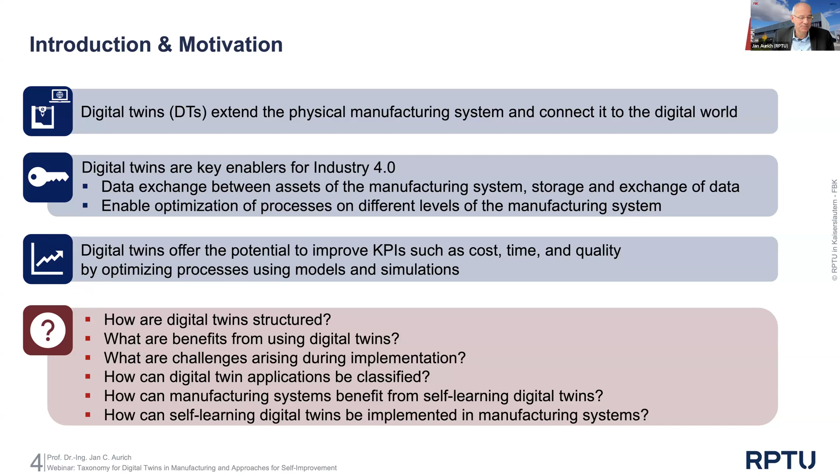So a little bit staying with the introduction. If you look, the concept of digital twins is now a little older than 20 years. The first mention in literature we find around 2003, and this is taken actually from a reference and publication from Fei Tao, I think, from Beihang University. Many of you know him. So the concept was first mentioned, then there was like the first 7-8 years an exploration phase before the digital twin concepts got better and better in this incubation stage in the next 3-4 years. And since then, since about 10 years ago, we see a very fast growth actually in digital twin applications.

There are more and more areas where digital twins are applied. I mean, they come mostly from product design and engineering, mechanical engineering product design, but we apply them in manufacturing. That's what we do, but we also find digital twins in civil engineering of buildings, of cities. NVIDIA's Jensen Huang, in one of his recent talks, talked about a digital twin of the world. But if you look in more detail, it's mostly about weather forecasts and meteorology and climate forecasts at the moment. So we have many, many applications of digital twins being defined and implemented right now.

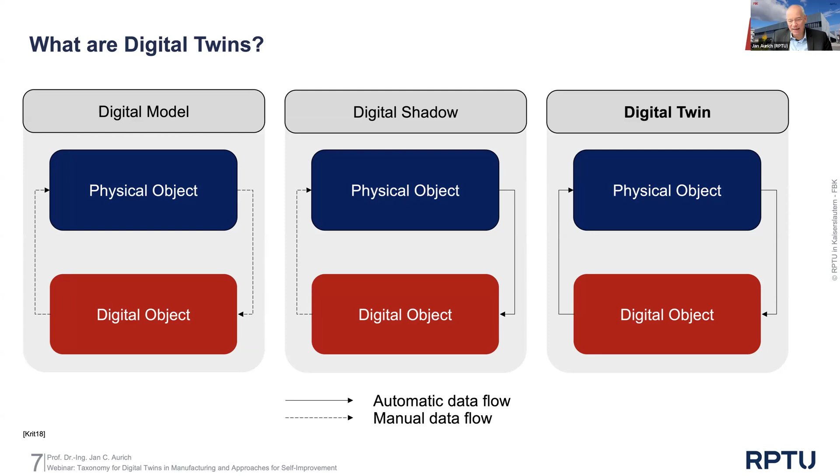If you go to a digital twin, we have both: the automated data flow from the physical object, and back from the digital object to the physical object. Only then should we call this a full digital twin. I'm now going to talk about the digital twin for the rest of my talk. So we have a data flow from the physical world to the digital world, and then back from the digital world to the physical world.

If we see what we can do with that, it's detailing what I already said. We have automated bidirectional data exchange, and an important point is also the real-time capabilities and high-fidelity virtual entity. I have to explain that a little because these terms are not absolute. What's real-time and what's high-fidelity?

Real-time can be quite different depending on the purposes, but I think it's always something between microseconds or seconds. It's not like we wait hours or days for feedback. For some applications, the time order of seconds may be enough.

But if I think of the use case I'll show at the end of my talk, a machine tool which is actually controlled from the digital twin, in that case in an edge cloud of a factory, you really need microsecond delay time—just a few single-digit microseconds from the digital twin to the real machine. So real-time is very often microseconds, sometimes a little longer, in the domain of single-digit seconds.

Then high fidelity means the digital object or representation should contain all the information necessary to do the intended control of the physical object and to understand it. But we have to be aware: digital representation is never a one-to-one representation of the physical object. Not all characteristics are part of the digital object, just the ones we need, but all the ones we need should be part of the digital twin.

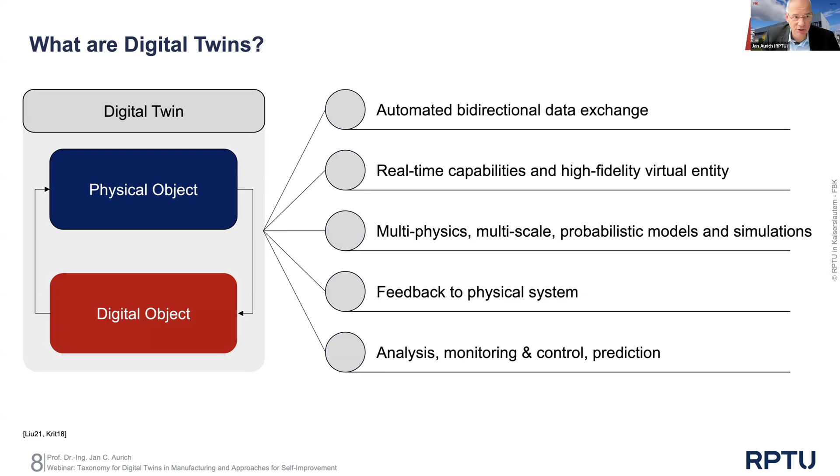And all of this can be part of a digital twin. We have the feedback to the physical modeling, to the physical system, and we use the digital twin for analysis, monitoring and control, but also for prediction of the behavior of the real-world physical object. So that's what the digital twin is about.

But we also like to include services as part of the digital twin. If you look at a factory, simple services like maintenance, provision of tools, and other things necessary for the manufacturing process. But it could also be training and education for workers—many services we can imagine for a factory. If we want a full digital twin, these should also be modeled and part of the data model used to represent the factory or manufacturing system.

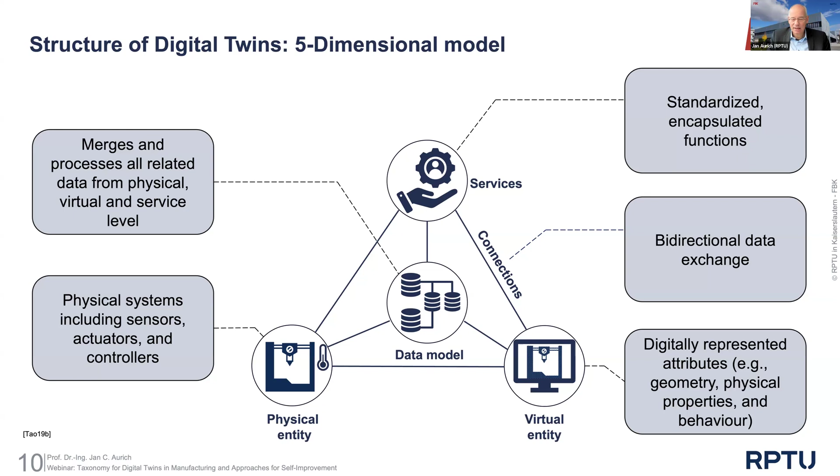The data model merges and processes all the related data from the physical, virtual, and service levels. Services have now standardized, encapsulated functions, and there's bi-directional data exchange, which I mentioned earlier. In the virtual entity, we have the digital representation of all attributes of the physical entity and the services provided, like geometry, physical properties, and behavior of the manufacturing system. So that is this 5-dimensional model of a digital twin.

If we look at the difficulties and challenges, why it's so difficult to implement a digital twin in manufacturing, there are several things to consider.

One is we still have a rapid evolution of the DT concept. So we implement a digital twin following the current state of the art, and a year later a new concept introduces new possibilities. It's not possible to have one static digital twin that stays the same as long as the factory is operating. I worked in the automotive industry, where passenger car models have a lifetime of 6-7 years. During that time the manufacturing system wouldn't change that much—there's continuous improvement, but the basic layout doesn't change. Yet that doesn't mean the digital twin can stay the same for 7 years, because it would become completely outdated given the rapid evolution of the DT concept. That's difficult to incorporate and follow.

Then we still have a lack of standardized DT approaches. There are some—I'll talk about one, the AAS, in a second—but it's not like we have one worldwide accepted standard for digital twins that everyone uses. There's been a lot of development in the past years though, so I think we're proceeding quite well there.

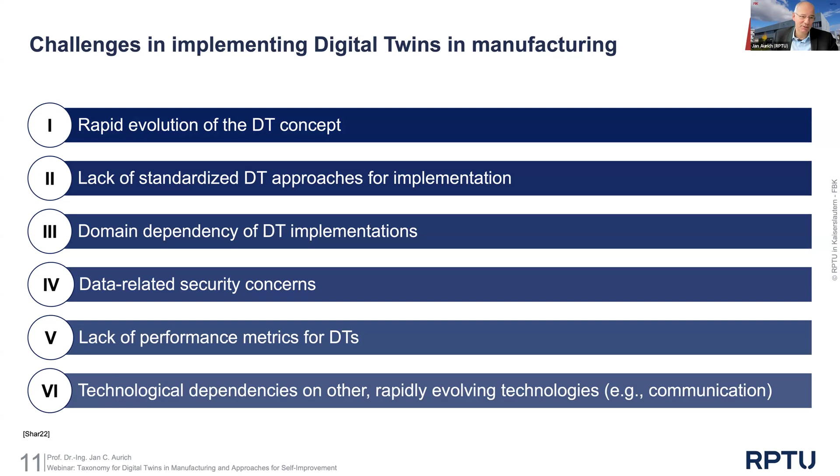Okay, then what we use now, and I talked about lack of standards. There are a couple of standards already implemented and accepted worldwide. One is the AAS, or Asset Administration Shell, which has been standardized to guarantee interoperability for autonomous systems and also AI applications, but mostly interoperability for autonomous systems. And we can use this also for standardized data exchange for digital twins and for the implementation of digital twins.

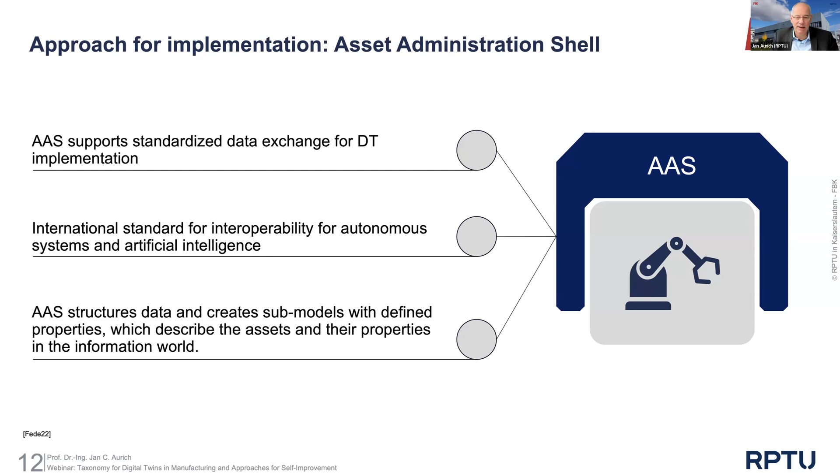AAS structures data, creates submodels in predefined ways with defined properties. So we have a standard to describe the assets and their properties as they're in the physical world, in the virtual, or in the information world. So AAS is one of the standards which are now implemented, which are very well suited to be also applied to digital twins.

So let me come to an interim summary, because before I come to the second part of my talk, if you look at digital twins, there's a lot of research, interdisciplinary, extensive, with heterogeneous results on digital twins. We have really lived through the shift from the concept phase now to implementation phase and evaluation of digital twins, despite all the challenges which are still there.

There are various use cases, and there's one difficulty: they're sometimes difficult to compare, because there's no single taxonomy for digital twin, which makes it difficult to compare the use cases in terms of performance.

And that leads me to the first, say, new or scientific part of my talk here: how can we classify DT applications? And then the second question will be, where is DT research heading in the future? And then I'll talk about self-learning digital twins. Okay, let me go to the taxonomy.

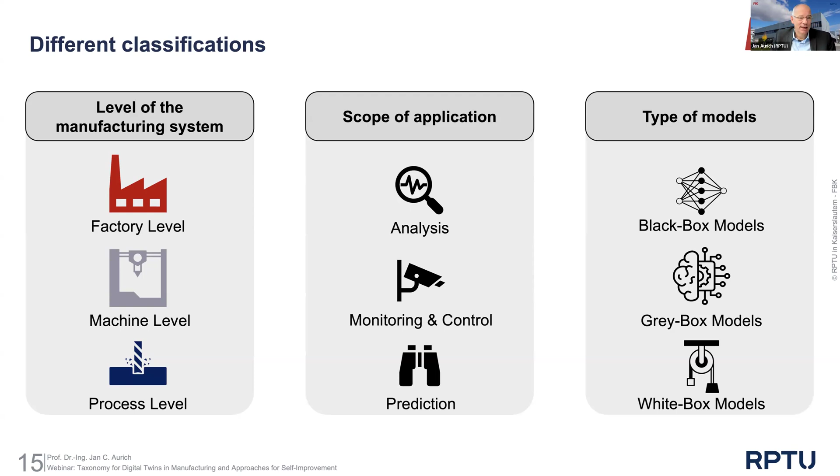So as I told you, I want to look a little bit at this distinction of the levels in the manufacturing system. So the factory level is infrastructure above the machine levels, like your material flow, the layout of the factory, also the information organization in the factory. And that, of course, is important for value creation through the machines and processes. So it's the overall factory layout.

Then on the machine level, we look at the manufacturing equipment. So that's machines mostly, like very classical, like a machine tool, a milling center, or a machine for additive manufacturing, also a robotic system for handling could be here. And actually, this is probably the area where the implementation of digital twins is the most advanced in manufacturing, because every machine tool maker now has a digital model of the machine, and it's also prepared to have this bidirectional data exchange.

And then if you go down to the process level, there are a lot of physical modelings, like finite element, or molecular dynamics models, or discrete element models, to model all these manufacturing processes, like a cutting process, a forming process, additive manufacturing process.

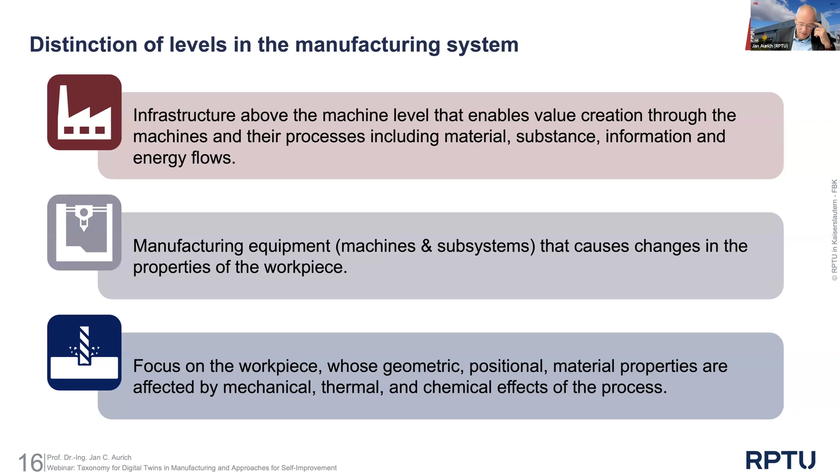On the factory level, to finish this topic, we have modeling and optimization of the entire production system with regards to efficiency, performance, cost effectiveness, also quality of the products coming out, or energy efficiency if we have an issue coming from sustainability considerations. On the machine level, we monitor and control the individual machines. And on the process level, we really look at the manufacturing processes and try to optimize those.

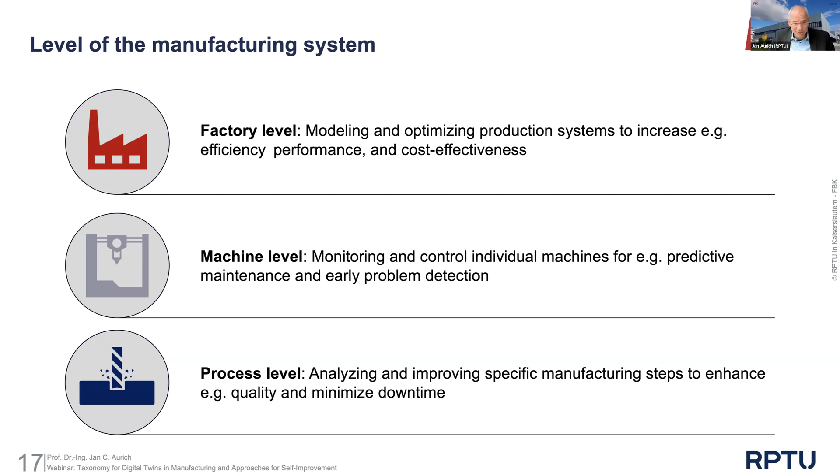So that is one category for our taxonomy for the digital twin. The second is scope of application. That's more straightforward, maybe, because it's really the scope.

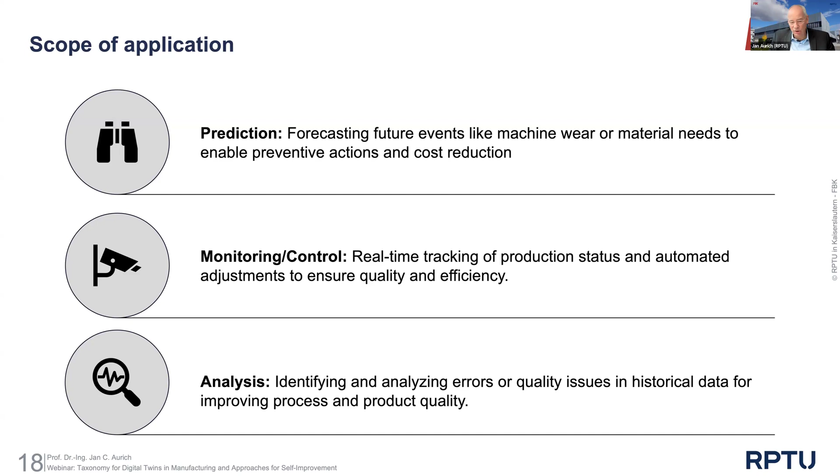Do we want to predict things like forecasting future events, for instance machine wear, material needs, to enable preventive actions in the factory? Then we have monitoring and control, so that's real-time tracking of production status, and bidirectional data exchange, automated adjustment to ensure quality and efficiency. And then we have analysis: identifying and analyzing errors, quality problems in historical and existing data, with a goal to improve process and product quality.

So the third classification in this taxonomy is type of model. Do we have a white box model, using existing knowledge like physical laws to model a production process or a material flow? They offer transparency, we know what's going on there, and also deep understanding, but often take a very long calculation time.

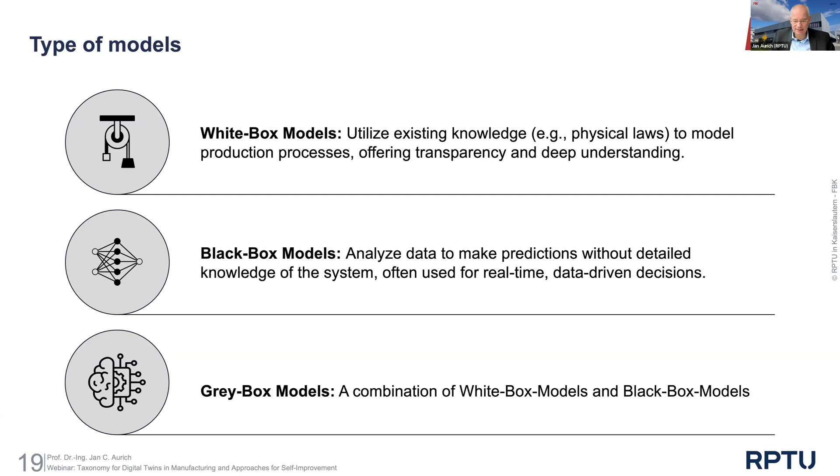Then we have these new black box models, which are data driven. So we take data from the factory, analyze it, and by that make predictions about the behavior without really knowing why the system behaves that way. And the gray box models, as I already said, are a combination of both.

And if you bring these three views together - level of the manufacturing system, scope of application, and model type - you kind of get this cube structure, a three-dimensional structure, and then you can look at what a typical or specific digital twin implementation does. It may be a gray box model on the machine level with the goal of doing prediction and monitoring and control. Then you have two of these little cubes out of the large cube in the center, which would form the implementation of this digital twin.

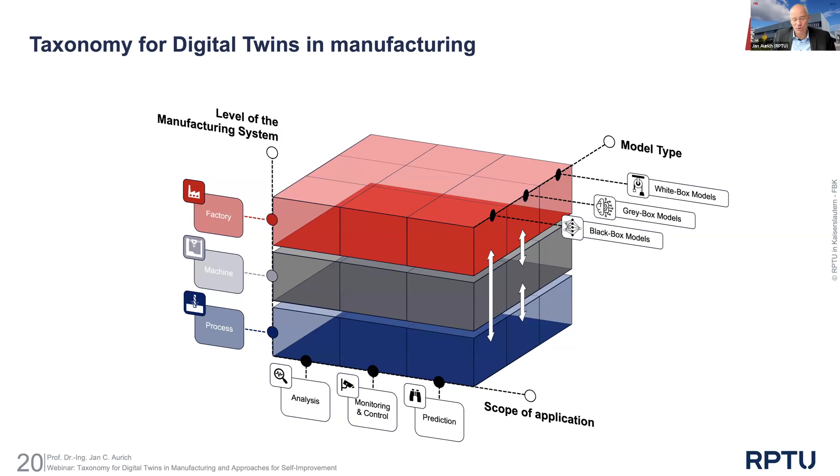So we think this is a quite nice way to show which of these parts - of course if you have all 3 by 3 by 3, so 27 little cubes implemented, that would be the highest coverage of a digital twin. But it's not in all cases necessary to do that. So it's completely fine to have a digital twin implementation which just does what is needed for the purpose, but then it should be clear what is not implemented when comparing it to another digital twin implementation. So that's our proposed taxonomy.

And now let me go on to this part of self-improvement for digital twins in manufacturing, and use the taxonomy already to look at ways for self-improving digital twins.

If I look at why we want to do this - of course, and I think also in this Auto Twin project, I don't have to convince anyone that we have to do this. We have to continuously update digital twins. They have to be adaptable to changes in the operational environment, and also to do continuous improvements of the digital twin. The factory may have continuous improvement steps, and of course they have to be reflected in the digital twin. And also, as technologies progress, it has to be possible to update the digital twin.

One other way to do this, even without technology changes, is to maybe initially have the digital twin deployed based on a white box model, a physical model. Then it may be slower than we would like. But as the manufacturing system operates and continuously generates data, this data can be used to generate a black box, or when combined, a gray box model, to improve the quality of the predictions a digital twin can make, going from a slower physical model to a fast gray box model.

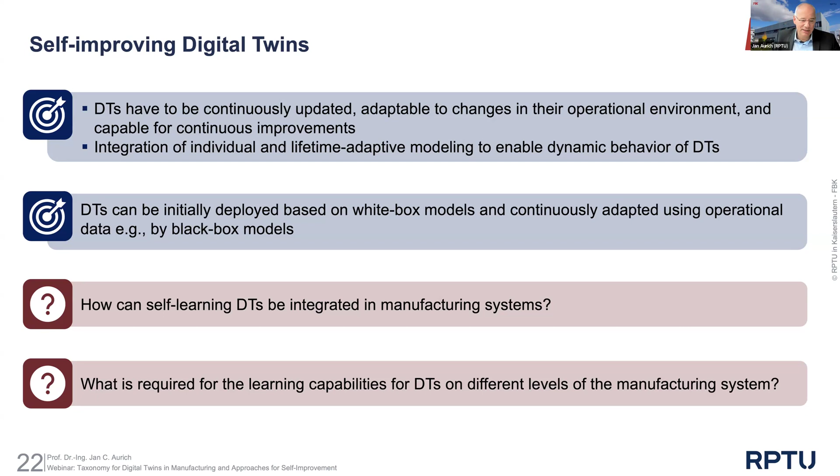So now this leaves the questions: how can a self-learning digital twin be integrated in a manufacturing system? And what learning capabilities are required on the different levels of a manufacturing system? I'd like to talk a little bit here about supervised and unsupervised learning.

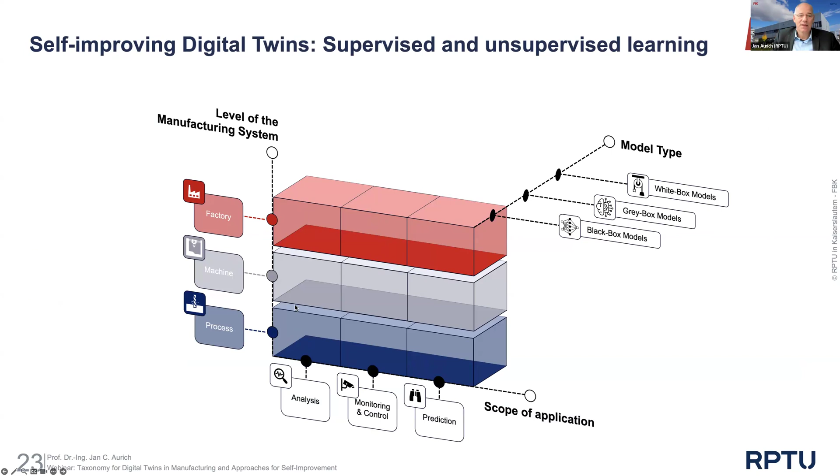That's now in relation to the black box models. If you look at where we are here in the black box model, we have scope of application across all three levels of the manufacturing system. And if we do supervised learning, what does it mean?

We need as input labeled data. So we generate data from our factory with all the sensors in a factory. We actually have a lot of data coming from factories now, but very often it's not used the way it would be possible. If we have supervised learning, we have to be able to label the data, then we categorize it. In three categories, for instance, we can classify, do regression analysis, do classifications.

Then we have unlabeled data coming into this process. The idea of supervised learning is that once we did this with labeled data, it is possible also to predict the outputs for new, unknown inputs which are not labeled. If we go to unsupervised learning, then we have completely unlabeled data, and do all the clustering, regression, or anomaly detection without data labeling. Of course, if we have labeled data, this is easier to do. But with unsupervised learning, we really have to find the patterns and correlations only in the data sets.

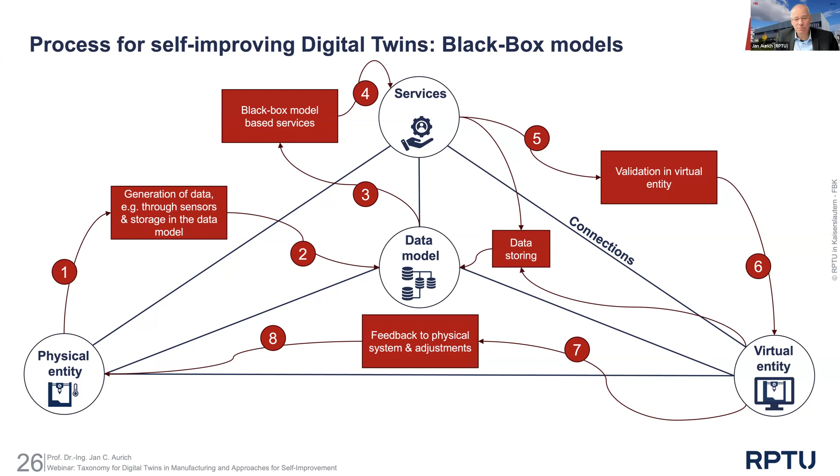So that's the second step. Then we have a data model, which is generated just from the data, so that's a black box model. But we can then provide services for the factory, like maintenance, for instance, from the black box model. Then we can validate that in the virtual entity and try to generate more understanding of what's going on there, store data again, and give feedback to the physical systems, making adjustments in the physical system. So that would be one concept for a self-learning digital twin with a pure black box model.

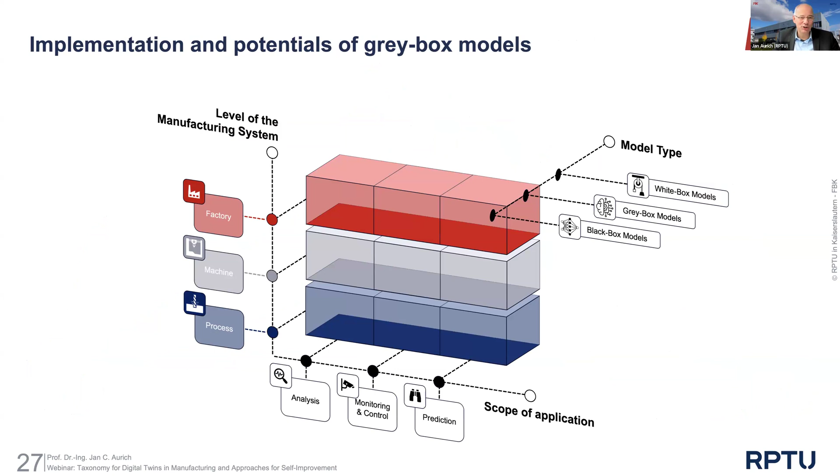Now, if we go to the gray box model, this means in our taxonomy, this entire thing shifts one. We look at the cube like a center of the cube, and have the implementation of the potential gray box model. Then we may start with white box model based services. We may have a physical representation of our factory to do predictions there. We store the data from the white box model, and from that we develop black box model based services, which again are used as services.

And then, of course, we can combine the white box model-based services and the black box model-based services to have gray box model-based services. And then they are, of course, again used to predict the behavior of the physical entity, to control the physical entity, and also to analyze its behavior.

Okay, with these two approaches, now I'd like to go on to my use case as the last thing I would like to look at, and show you how we implemented not all of these conceptual ideas, but quite a few of them already. We have a hybrid digital twin for a CNC machine tool. You see that on the lower left part. It's actually a machine tool with an open source Linux-based CNC.

This was the only way for us to really develop it and implement things the way we wanted to, because commercial CNC controller providers at the moment—some things are changing now—but when we started this project, they were not so open to these changes into their machine tool controls. But this is a 3-axis milling machine, and you see there the milling tool and the main spindle, and some of the kinematics.

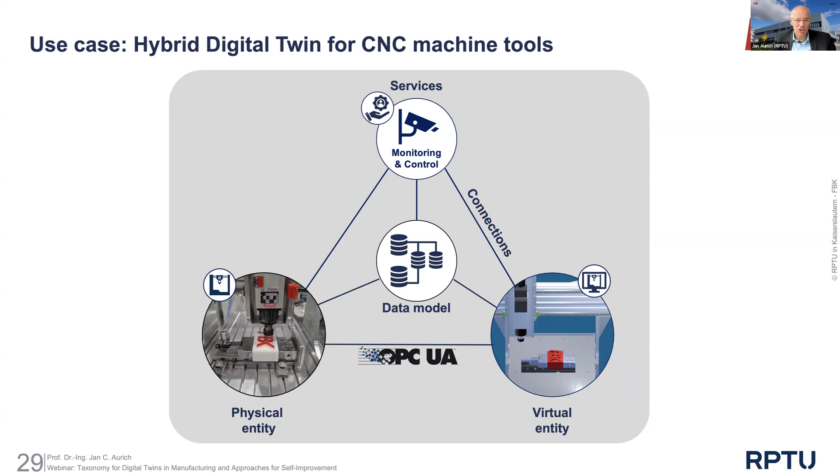If you look at this hybrid digital twin a little more - our initial situation was we had a digital twin at the machine level. If you think back to the taxonomy, that's just talking about the machine tool, with integrated connectivity to the machine control unit. It monitors the status and enables control of the machine. It's based on not only kinematic models, but also taking into account mass and acceleration as a result of masses - so a kinetic model, which is a white box model.

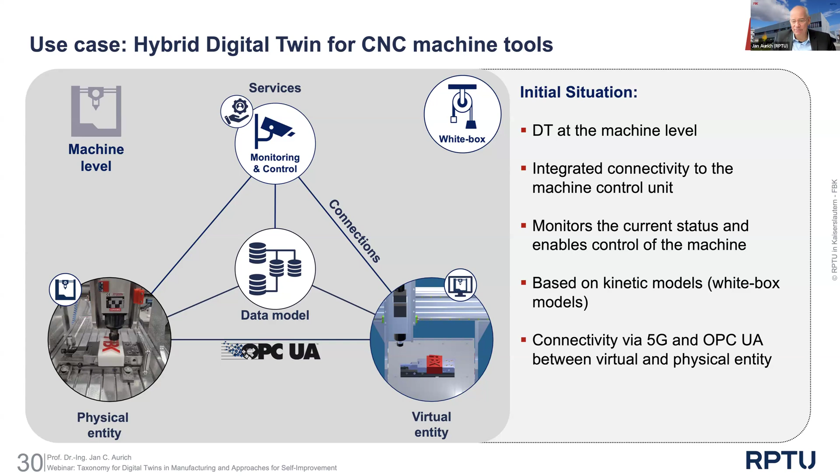And we have connectivity via 5G and OPC UA between the virtual and the physical entity. The improvements we did there are additional sensors - we now have wireless sensors in the machine tool. And then the data goes directly to the data model, which improves our possibilities to do analysis, monitoring, control, and also prediction of the behavior of the machine.

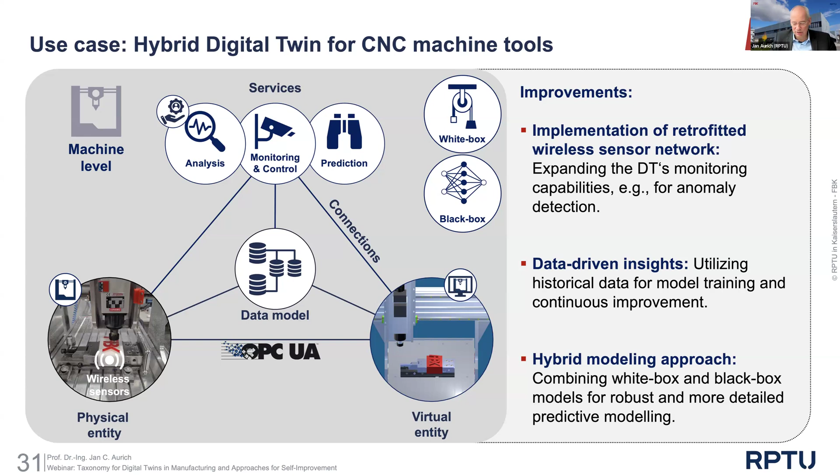We have data-driven insights using historical data from the machine to train the model and continuously improve it. But we still have the physical models of the machine tool - it wouldn't make any sense to throw away this available physical model, this physics-based knowledge on how the machine performs, and do everything just data-driven. So we already have a hybrid model implemented here.

That brings me to a summary, and then I'm open for questions and discussion. What I did in the last 45 minutes was give you an overview of what we here in Kaiserslautern think is the implementation when we talk about digital twin framework and implementation in manufacturing systems. We are proposing - and already did a couple of publications on this - a taxonomy and an approach for self-improving digital twins: to use for black box models supervised and unsupervised learning, but also to use the physical knowledge about the machines which is available, to come to a hybrid or gray box model. And lastly, I showed you this use case, our hybrid digital twin for a CNC machine tool.

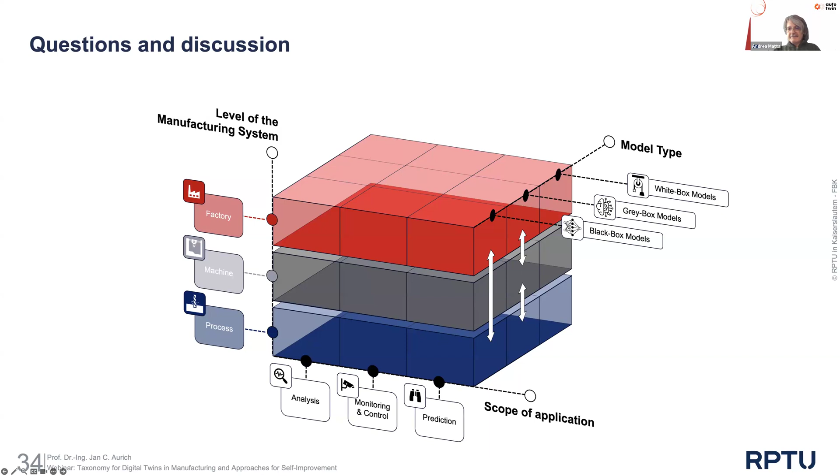Thank you, Professor Aurich, thank you a lot, very nice talk. Let's see if - okay, there is a first question in the chat from Nicola Cialini.

Nicola Cialini asks if you have experience with digital twin implementation in small and medium enterprises.

That is an important question, not only for digital twin but around this entire topic of digitalization for SMEs. I would say we had some experience with doing digital twins for SMEs, but it depends very much on the kind of small or medium-sized enterprise you go to. For a traditional manufacturing company which has been making excellent machines for a long time, it's very difficult right now to be fast enough in implementing these things. But a startup company, which I would also see as an SME, is often very good at implementing digital processes and digital twins. For traditional mechanical engineering companies it's very difficult - they very often don't have the people with the knowledge to implement that, so they have to look for outside help to really implement things.

So I would say it's possible, but it's not easy for a traditional mechanical engineering company to do this. After implementation, there is the maintenance - they don't have the expertise to maintain these digital twins. So it is difficult, but it's important for them to do this, and to at least hire some people who have the knowledge to do the maintenance. The implementation and design of the digital twin can be done with outside help, but for maintenance you need at least some inside knowledge.

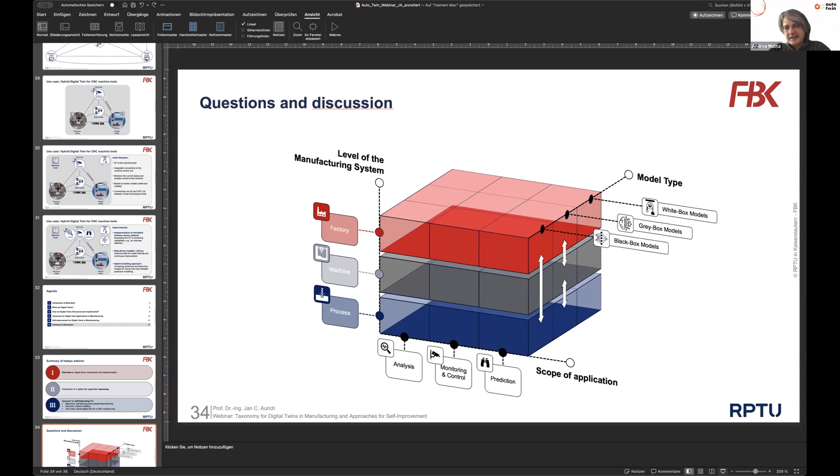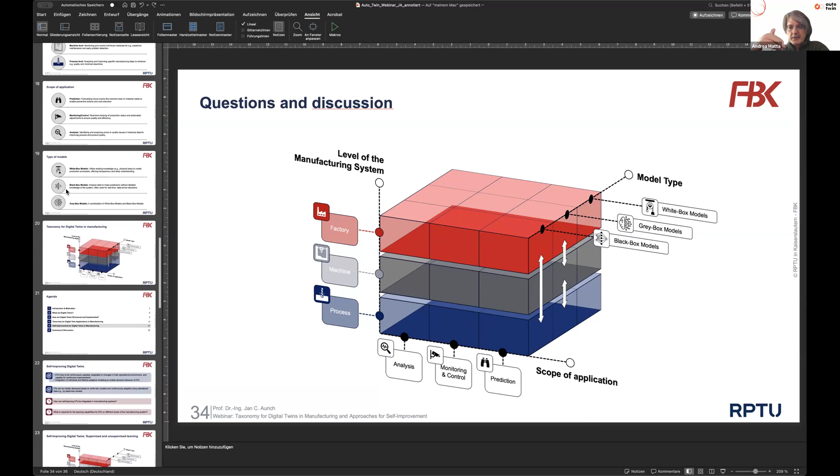The question is whether the data goes directly from the system, like the sensors, to the virtual entity, or via the data model. But the physical entity here - is that model really the physical entity, or is it the model of the physical entity that the digital twin builds?

It's a production line. I know that there are 5 machines, and I don't have a model of the transporters, for instance. Then with the data, I understand that there is one AGV, for instance, and I add this information into the model of the physical entity. Because otherwise, it's not a model - it's just a physical entity. So what is your view? I think it's more the model, but it's a very difficult question.

If you look at the machine tool, as you said, the machine tool itself has also a lot of digital components. We have discussed this a lot - is this part of the real world factory, or is this part of the digital twin? That's sometimes, I think, not really clear. So probably it's correct to say we have the data, and that's why the data model is in between. Actually it's even more - that's a question I have discussed a lot with colleagues.